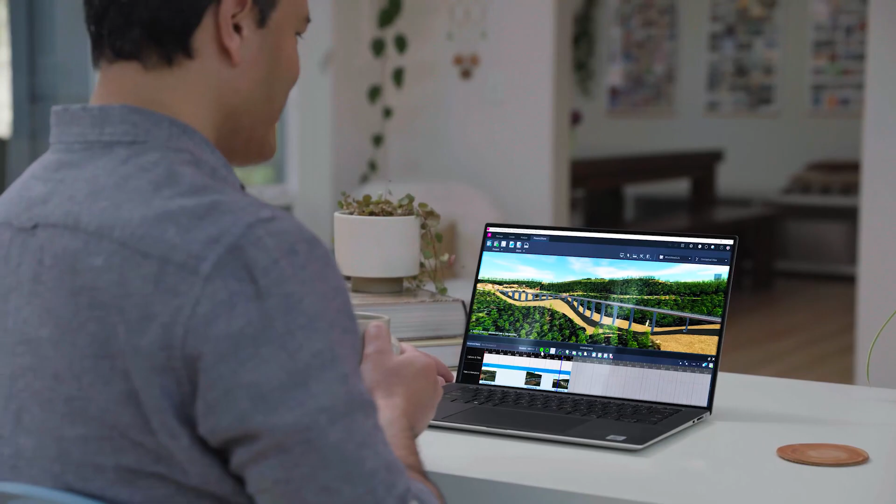InfraWorks 2024 adds powerful capabilities for civil structures designers, driving operational efficiency through reduction in design time and enhanced data exchange.

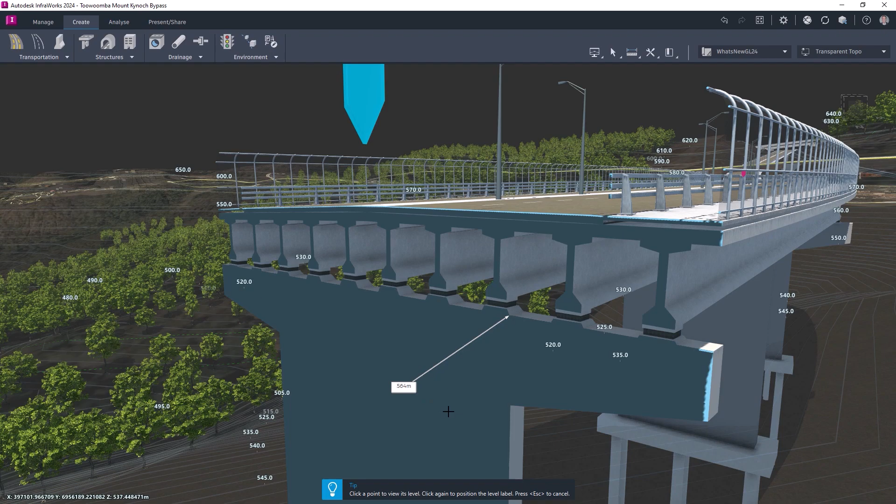Critical geometry can now be identified quickly with the enhanced point level tool. Spot levels can be taken anywhere on the structure with the tool snapping to critical points in both 2D and 3D planes.

When importing custom components, both optional and expected parameters are now listed in the dialog, reducing the chance of design errors.

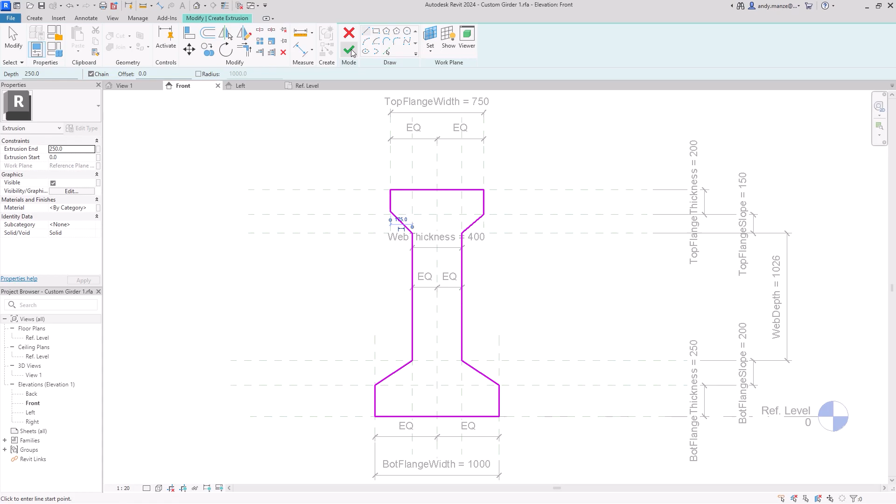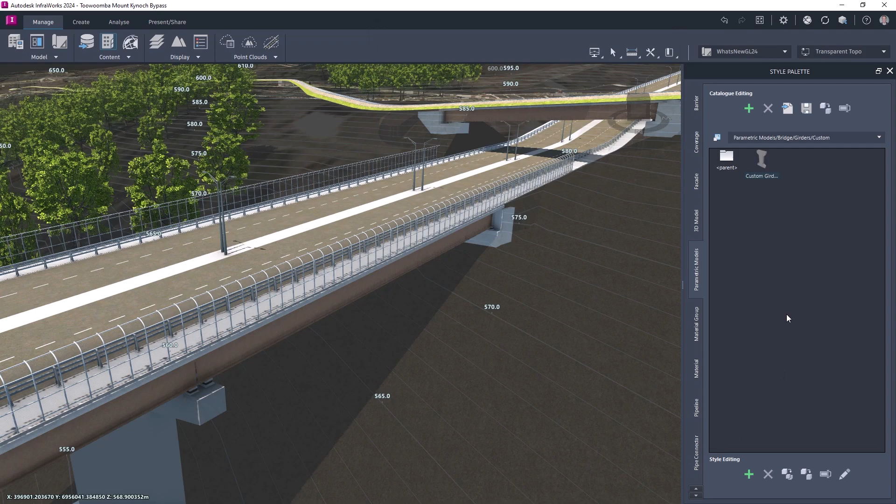The use of consistent and familiar toolsets can often aid efficiency in the creation of design components. The support for Revit families has now been extended to include 2D geometry in addition to 3D components. Once the 2D outline has been developed in Revit, it can be added to the InfraWorks library of components, providing a consistent method for adding decks, girders, and tunnel sections.

Once the library has been extended with the new components, they can be selected and added to the structure. These new components can then be copied and manipulated in the normal way.

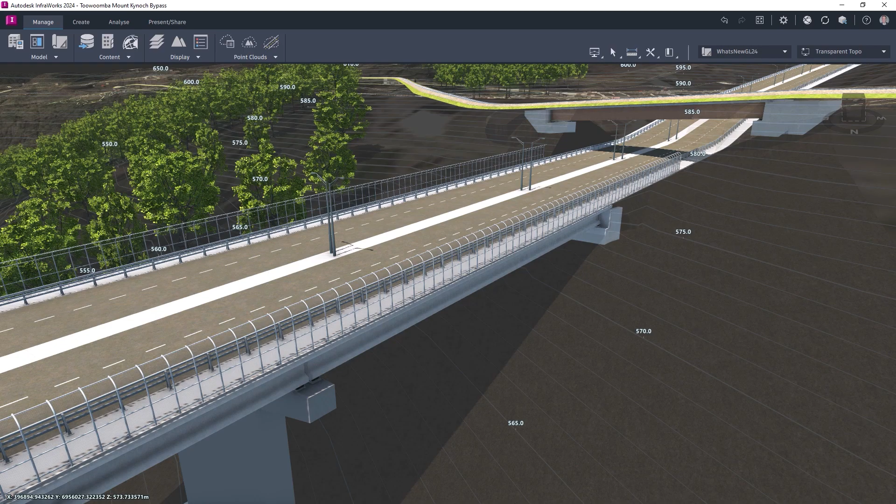When importing custom parts with subcomponents, each subcomponent can now be configured with its own Revit category, and individual categories can now be applied to generic models to satisfy Revit category design requirements.

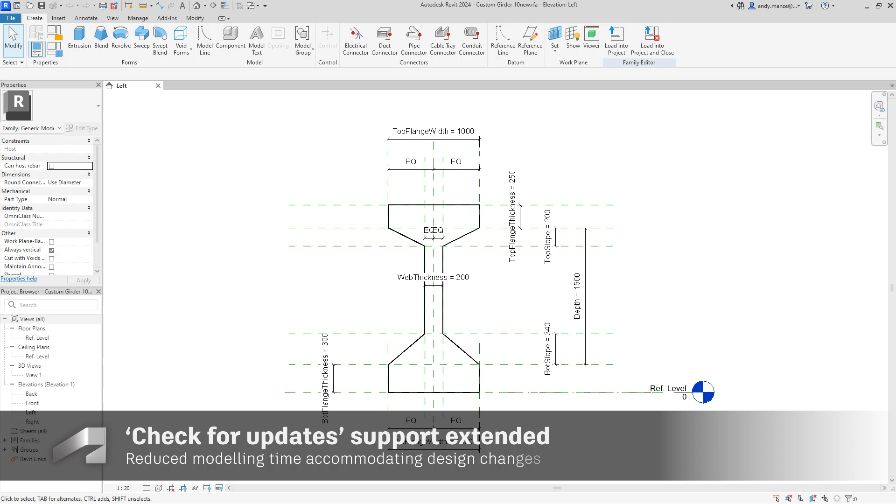In order to accommodate design changes more efficiently, the Check for Updates feature has been extended to cross-frames and 2D slice-based geometry, where 2D slice data is respected during the update process.

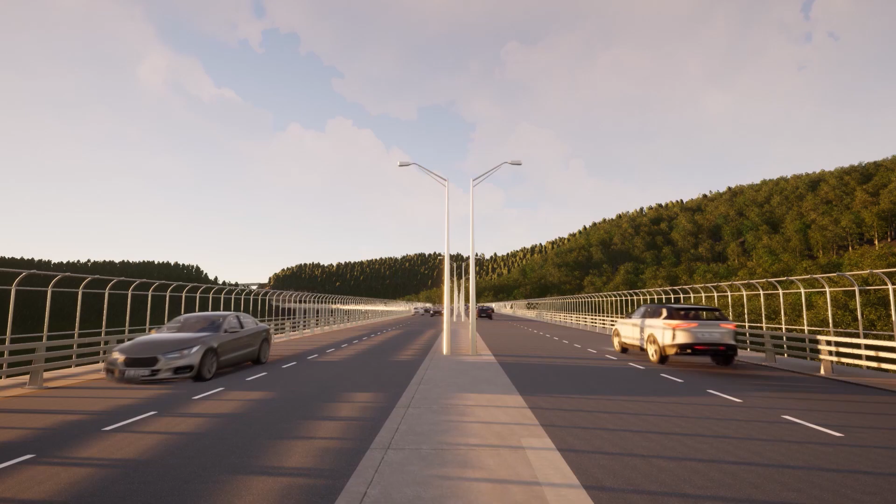These new features complement an already comprehensive advanced toolset for bridge designers, ensuring design requirements can be efficiently met. These capabilities now cover structural analysis, component design, modelling, and visualization of bridge structures.